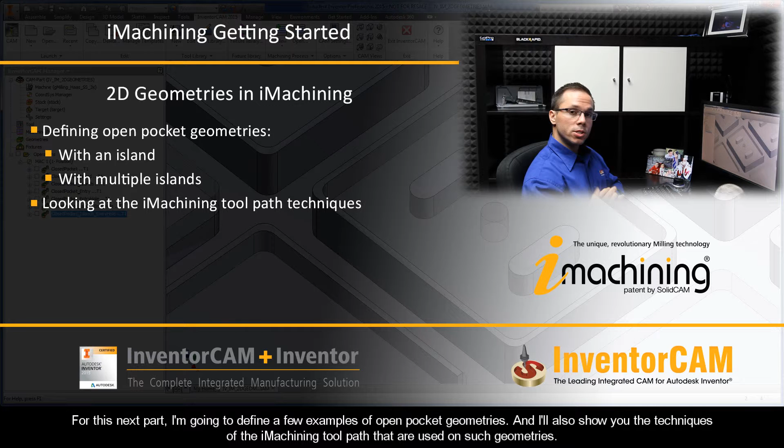Hi again, folks. Now, in the previous video, I went over how to define some basic examples of closed pocket geometries in iMachining. For this next part, I'm going to define a few examples of open pocket geometries. And I'll also show you the techniques of the iMachining toolpath that are used on such geometries.

When watching, just keep in mind what I told you about chain picking. The chain selection order is very important. And just a quick tip, I might as well mention it now. If you ever run into any issues where the toolpath is giving you a strange result, I would troubleshoot by first checking to make sure that your chains are selected in the correct order. In any case, now I'll get started with my first open pocket geometry example.

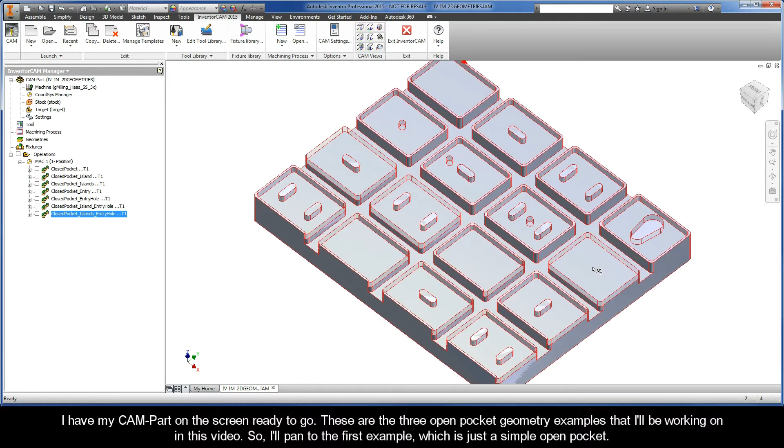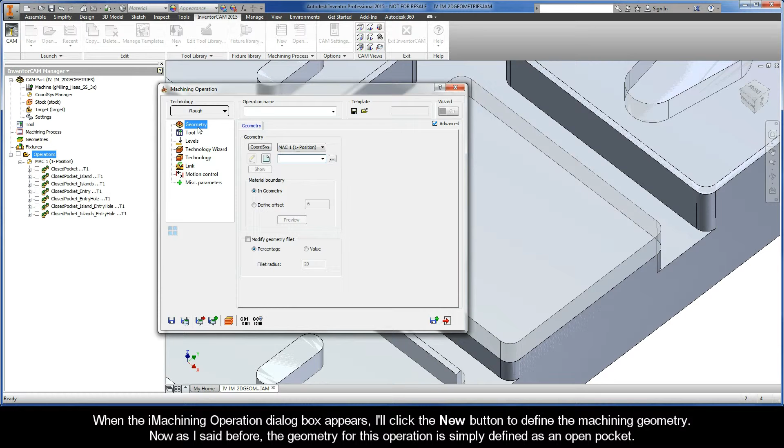I have my CAM part on the screen ready to go. These are the three open pocket geometry examples that I'll be working on in this video. So I'll pan over to the first example, which is just a simple open pocket. To add an iMachining operation, I'll go to the InventorCAM manager, and then I'll right-click Operations, Add Milling Operation, and select 2D iMachining. When the iMachining operation dialog box appears, I'll click the New button to define the machining geometry.

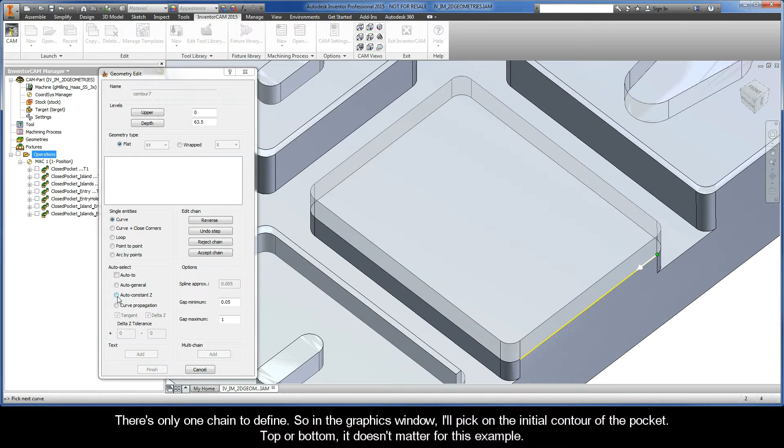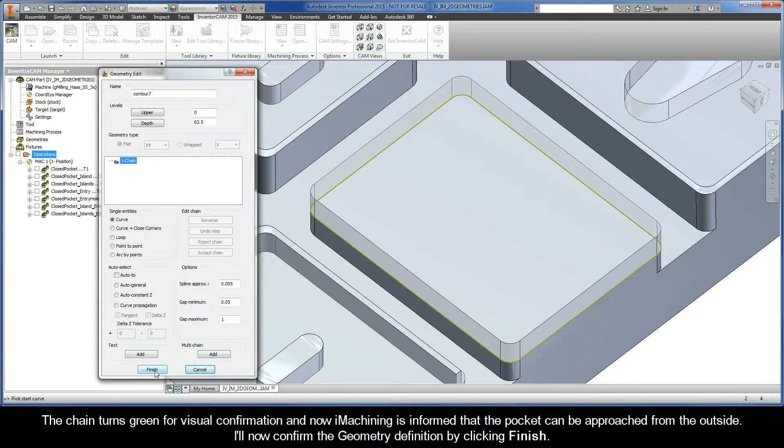Now, as I said before, the geometry for this operation is simply defined as an open pocket. There's only one chain to define, so in the graphics window, I'll pick on the initial contour of the pocket. Top or bottom, it doesn't matter for this example. I'll select Auto Constant Z to close the chain, and then I'll click Yes to accept the chain selection. I'll go to the chain list again, right-click Chain 1, and just choose Mark Chain as Open. It's that simple. The chain turns green for visual confirmation, and now iMachining is informed that the pocket can be approached from the outside. I'll now confirm the geometry definition by clicking Finish.

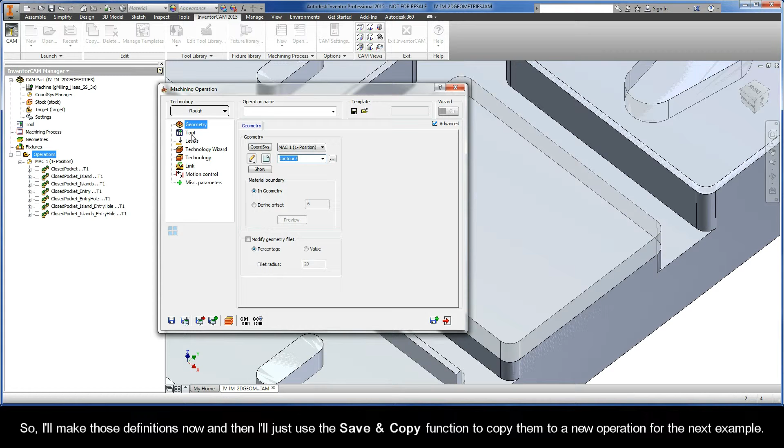Next, I have to make the tool and levels definitions again. For anyone just joining in, all the pockets in this example use the same tool and have the same exact depths. So I'll make those definitions now, and then I'll just use the Save and Copy function to copy them to a new operation for the next example. Moving down to the Tool page, I'll click the Select button to display the Choosing Tool for Operation dialog box. I'll select tool number 1 from the list, and then by clicking Select, I'll exit the Part Tool table.

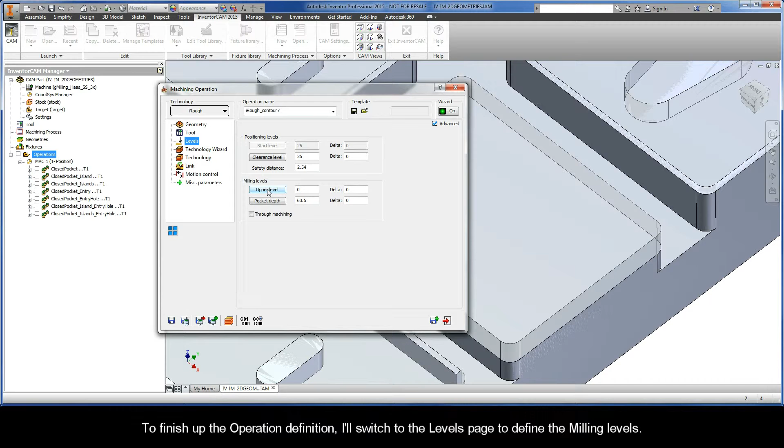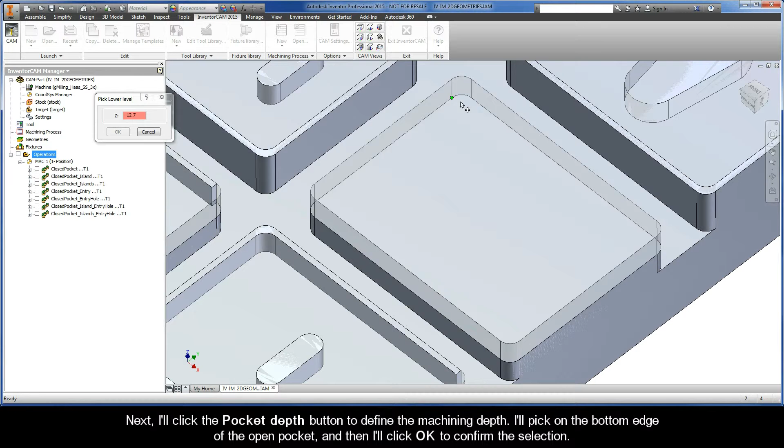To finish up the operation definition, I'll switch to the Levels page to define the milling levels. I'll click the Upper Level button, and then in the Graphics window, I'll pick on the top face of the stock model. This is again the Z level where the machining will start. And to confirm my selection, I'll click OK. Next, I'll click the Pocket Depth button to define the machining depth. I'll pick on the bottom edge of the open pocket, and then I'll click OK to confirm the selection. In my continued effort to kind of keep things organized here, I'll name this operation Open Pocket.

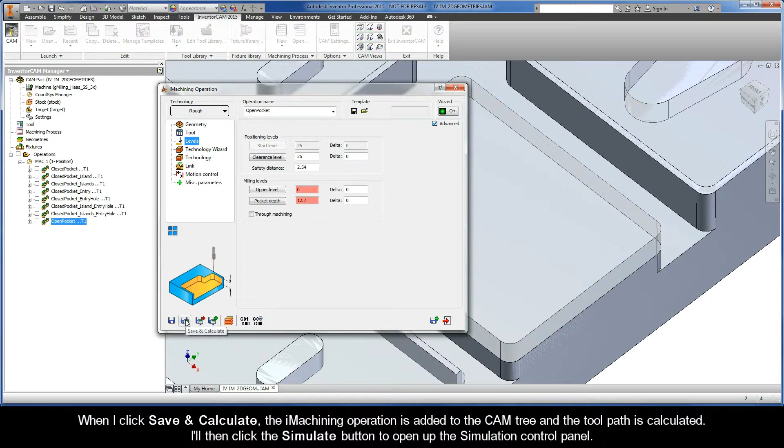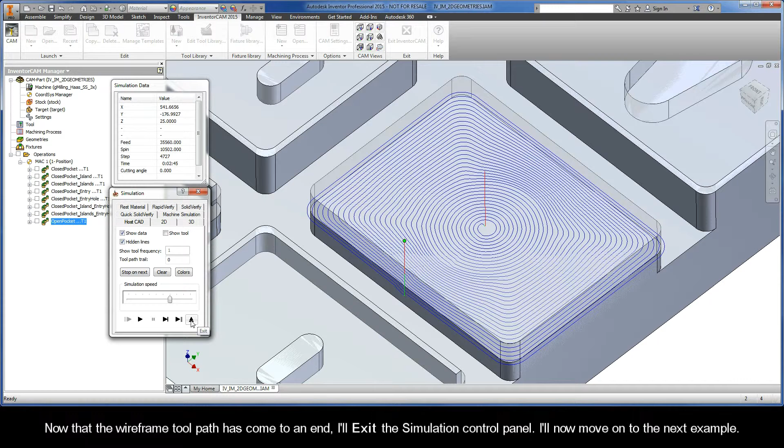When I click Save and Calculate, the iMachining operation is added to the CAM tree and the toolpath is calculated. I'll then click the Simulate button to open up the simulation control panel. Clicking Play will show the iMachining toolpath approach from the outside and clear the entire face with what's called a converging morphing spiral. Now that the wireframe toolpath has come to an end, I'll exit the simulation control panel. I'll now move on to the next example.

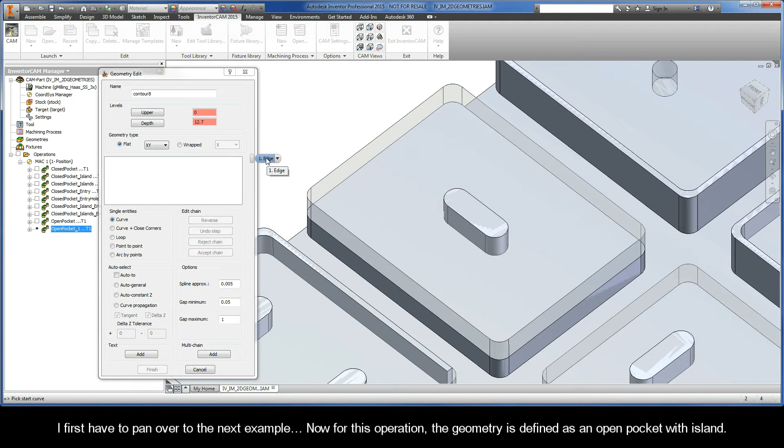First, I'll click the Save and Copy button to start a new iMachining operation with all the same settings. On the Geometry page, however, I'll click the New button to define the new machining geometry. And I first have to pan over to the next example. Now, for this operation, the geometry is defined as an open pocket with island. The first chain to select is the outer chain. So in the graphics window, I'll pick on the pocket contour. Then using Auto Constant Z, I'll close the chain, and then I'll click Yes to accept the chain selection.

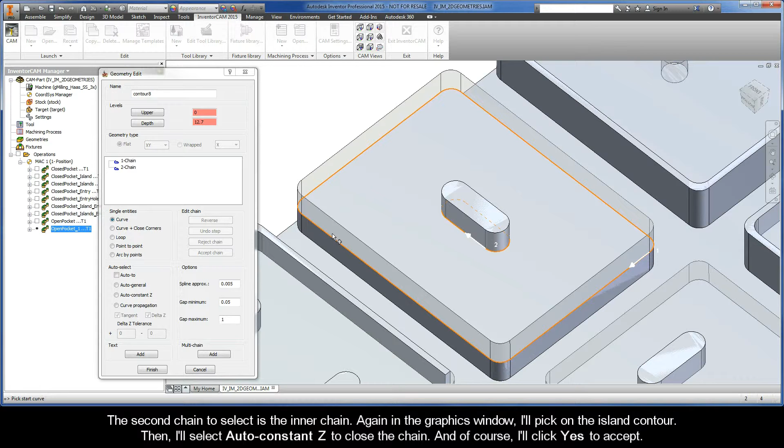The second chain to select is the inner chain. Again, in the graphics window, I'll pick on the island contour. Then I'll select Auto Constant Z to close the chain. And of course, I'll click Yes to accept. To finish up the geometry definition, I'll right-click the outer chain, chain 1, and choose Mark Chain as Open. I'll then click Finish to confirm the geometry selection. This operation I'll name Open Pocket Island.

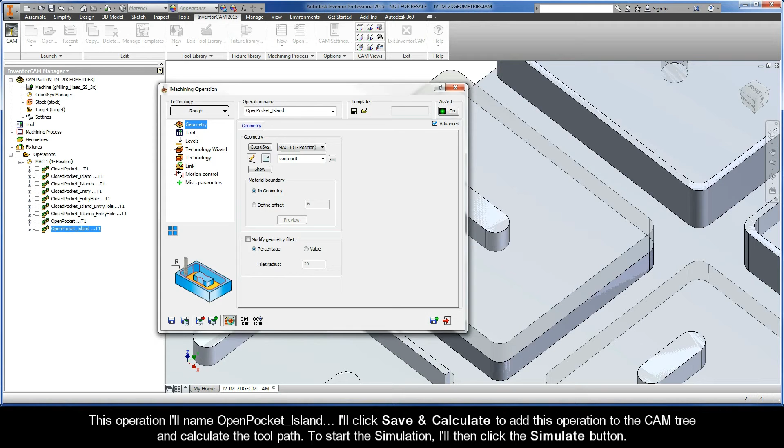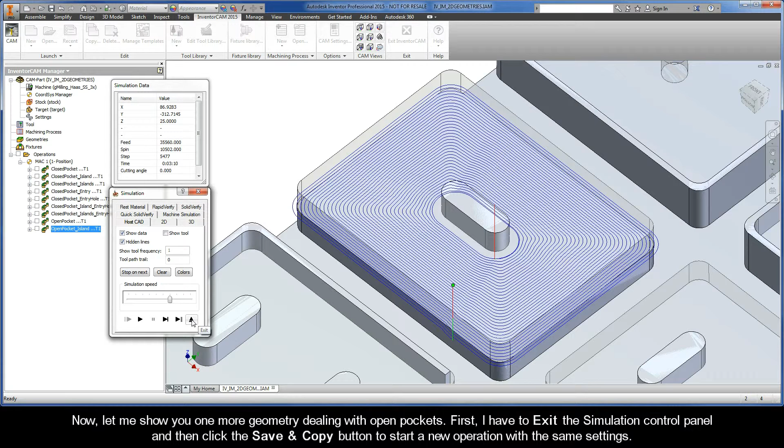I'll click Save and Calculate to add this operation to the CAM tree and calculate the toolpath. To start the simulation, I'll then click the Simulate button. When I click Play, you'll see that the iMachining toolpath is very similar to the previous operation. The tool approaches from the outside and then performs a morphing spiral towards the island. Now, let me show you one more geometry dealing with open pockets. First, I have to exit the Simulation Control Panel and then click the Save and Copy button to start a new operation with the same settings.

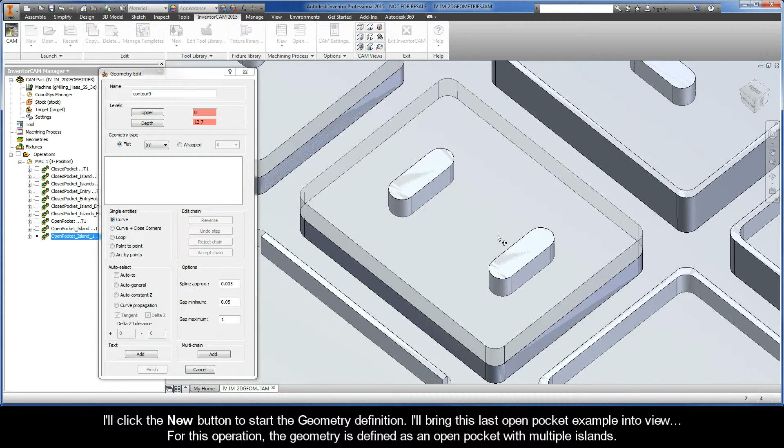I'll click the New button to start the geometry definition. I'll bring this last open pocket example into view. For this operation, the geometry is defined as an open pocket with multiple islands. The first chain to select must be the outer chain, and then the two inner chains can be selected. In the graphics window, I'll pick on the initial pocket contour. And of course, I'll use Auto Constant Z to quickly close the chain, and then I'll click Yes to accept the chain selection. Next, I'll pick the two chains on island contours and use Auto Constant Z to close the chains. Then by clicking Yes, I'll accept the chain selections.

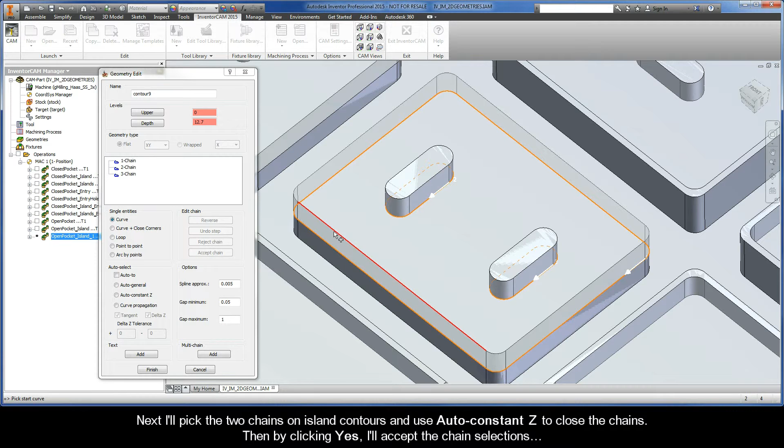And finally, the chain on pocket contour has to be marked as open. So again, I'll right-click Chain 1 and choose Mark Chain as Open. Then by clicking Finish, I'll confirm the geometry definition. I'll name the operation Open Pocket Islands. I'll then click Save and Calculate to add this iMachining operation to the CAM tree and to calculate the toolpath.

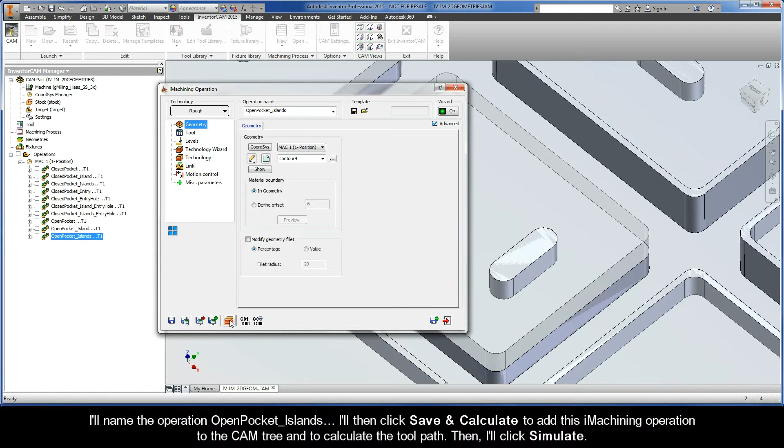Then, I'll click Simulate. Now, I'll click the Play button to display the wireframe toolpath on the model. The tool approaches the pocket from the outside and collapses in on the islands. The first island that's encountered is separated, and then a final morphing spiral is formed around the second island.

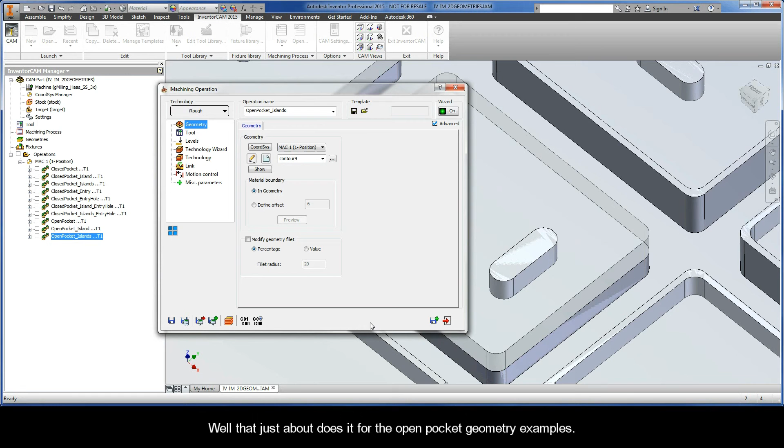Well, that just about does it for the open pocket geometry examples. These are again just basic examples, but I hope they give you good insight to how open pocket geometries are defined in iMachining and some of the toolpath techniques that are used when cutting those geometries. Join me for the last part in this series, where I'll show you how several types of semi-open pocket geometries are defined in iMachining.